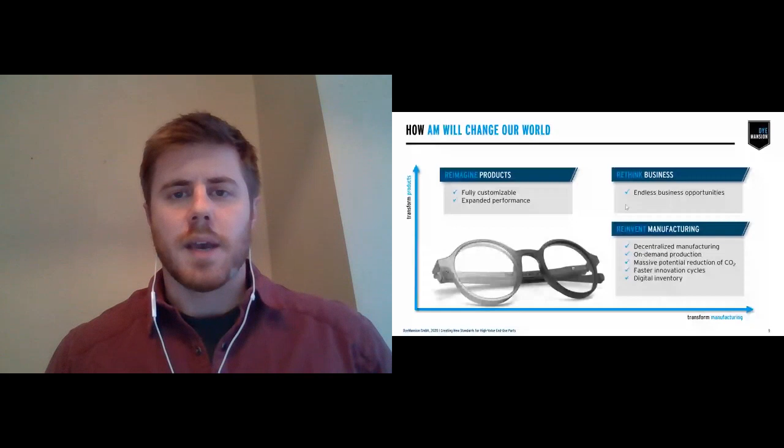So what do we actually need to have happen to change this industry? We need to be able to push this into high-value and end-use parts, and we need to do that at scale.

So what do we do at Dyemansion? We turn 3D printed parts into things like high value eyewear. We can turn all these parts into opportunities, like this automotive part, which is actually a rest inside the automobile. Or we could even turn some of these parts into high fashion jewelry. And lastly, one of the big opportunities here now is in the medical space.

So what's currently available in the market, and why does it not meet what the industry needs? The big reason here is because it's a manual approach. What exists right now is your manual sandblasters, where you have a couple different technicians who might be operating them on different days, and we see opportunities for damaged parts. That could just be as simple as technician 1 does it a little bit different than technician 2. Their distance from part to nozzle might be a little bit different.

Their blasting strategies, or even just the duration in that chamber, might be different, and you're going to have inconsistent results every time. When we talk about dyeing parts, there are a couple options out there that are very easy to start with. The image on the bottom there is actually a pot dye sample. It's what's very common in the industry right now. But again, that's a very non-reproducible approach. As you can see, it's a hands-on approach. So if you have different technicians doing it, you might have different chemistries or mixtures each time. And again, if you have a very specific application, it's nearly impossible to find any kind of ISO certifications around that.

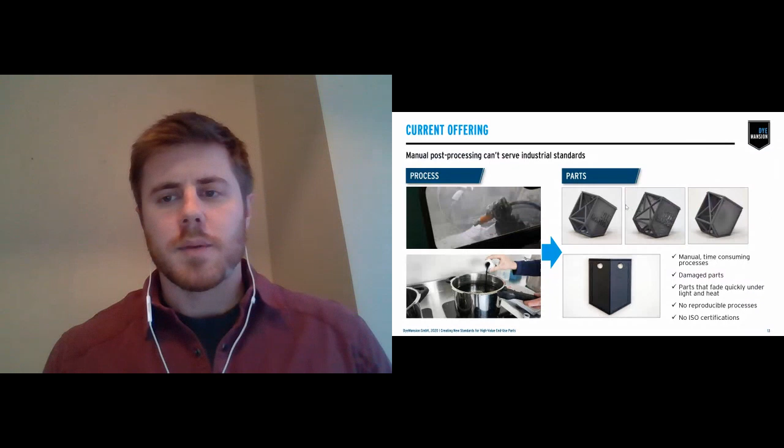So where do we focus all of our efforts? We started mostly in the powder bed technologies through your SLS and MJF, with all the most commonly used materials that exist in the market, your PA12s, your PA11s, and your TPUs. And lately, we've actually moved that into some other technologies through SLA and CLIP, through the EPUs that exist through those technologies. And a big one here is actually ULTEM through FDM.

Now, ULTEM is one of the highest volume parts in aerospace industries. It's a very difficult part to push to the next step, from raw part to a finished product that's in the plane. There's a lot of extra processes that go before it's a painted part that goes into it. And that's where we can come into play, because we can actually eliminate all those manual processes prior to paint.

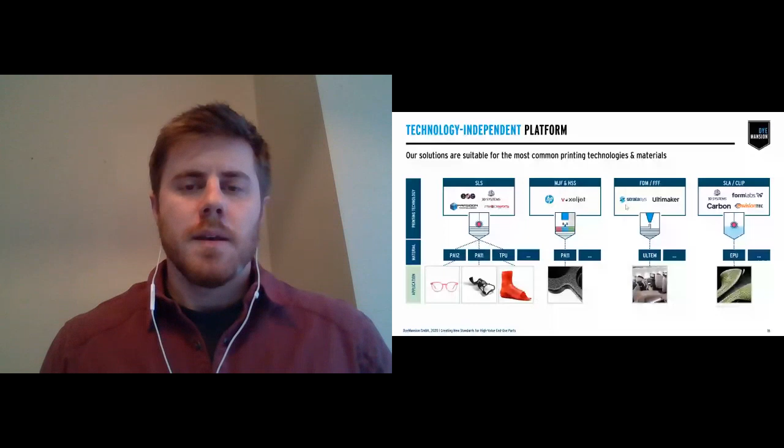So a little bit about Dyemansion themselves. We were founded back in 2015. We're located originally just outside of Munich, and now we have a facility in Austin, Texas as well, with a team of well over 60 people now.

So our founders did start the company way back in 2013 with the idea of 3D printed smartphone cases. And it didn't take them very long to realize that wasn't a successful approach. That's when they moved into the home of coloring. So in 2015, as you can see, it was a pretty eventful year. Initially created the birth of Dyemansion, moved into an initial seed investing round. And from there, we launched our first product, which is our DM60.

The DM60 was in the market for quite a while, and it was an amazing opportunity for customers to create new end-use parts. But the bad side was we had no controllability of what happened from print into our color machines, what those couple processes were, from depowdering, surface finishing, and whatever it might be. And then we saw challenges with deviations in part quality at the end.

So that's when in 2017, we really backtracked quite a bit and decided we need to standardize this process and create a controlled approach prior to color. So Dyemansion released our full workflow, which is the PowerShot C, the PowerShot S, and then the DM60. What this did is it actually controlled all those user processes, so we can guarantee a reproducible finish afterwards.

So in 2018, we realized that we really wanted to push even further in R&D and development and continue our expansion. So we had our first Series A funding round of a little over 5 million euros. And that's when we expanded into the US. We grew our North American team, serving all of the Americas. And we also launched a couple of new color lines, very specific applications here.

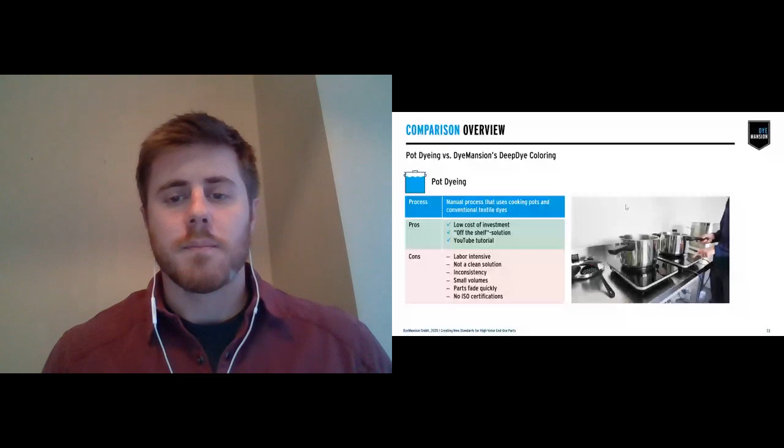Because it's using a cartridge-based system, it has that traceability, so we can go all the way back to the recipe. If there was ever an issue, we can understand what batch that recipe came from, and whether the problem was in the pigment itself or traced into the machine. We can track the heat values in the machine and how it was actually working.

With this, we offer almost a near unlimited color option and also the ability for color matching. So if corporate colors are key, or even matching skin tones on some medical devices, that's fully capable. The big benefit here is also that we can meet all of your ISO certifications that exist on the market. We'll get into that a little more later. And as I mentioned, with the seamless integration, it allows for reproducible results.

If we want to dive a little further, when you're looking at your ROS, we do offer a reverse osmosis system for guaranteed water results coming into the machine, and also an add-on reservoir for customers who are running black cartridges for multiple uses on a single cartridge.

Now, with any piece of equipment that exists in the market, there are some downsides. It is a little bit longer process time—we're looking at around a 2.5 hour process time. And because it's a complete closed system, you are limited in batch size, because we also have to worry about water displacement when putting parts in there.

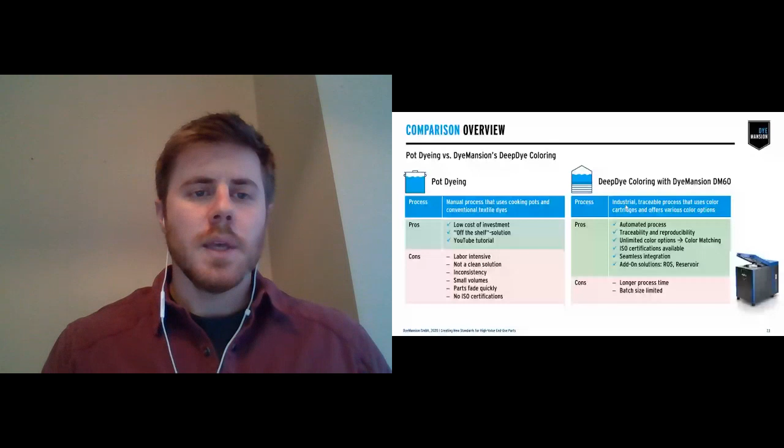Into the DM60 a little more: as I mentioned, almost complete limitless color options and a standardized database for your tailor-made recipes. It's based off an RFID chip, so it has reproducible and traceable results no matter what, and of course we have ISO certifications. For the standard process for your SLS parts, MJF parts, or even some EPUs, we're running around a 2.5 hour process from a raw part to a finished colored part at the end.

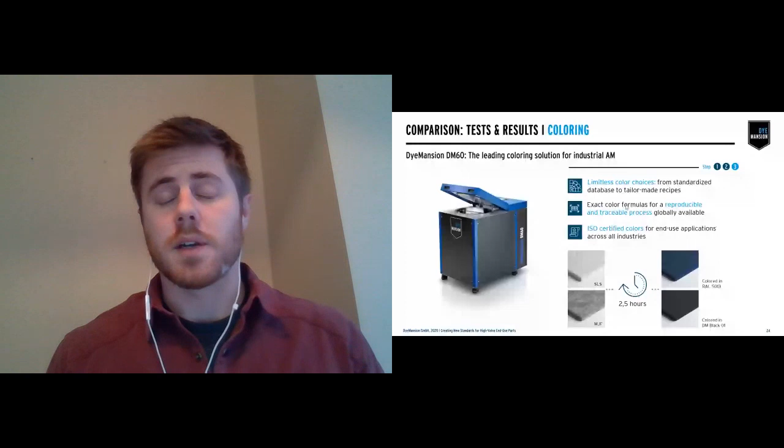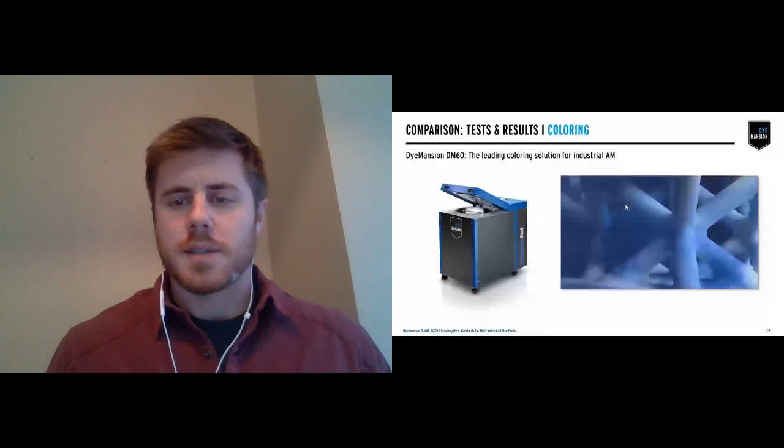What you can see is the dye going in—it's a water bath. Within this process, it's using a combination of heat and pressure to separate some of the molecular levels of the chemistries of the polymer, allowing that pigment to get in there. Then it seals it back up.

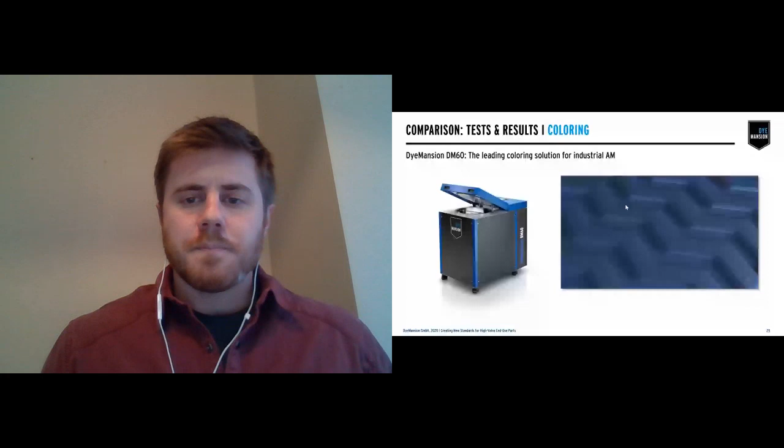So we can go from your SLS parts to a dyed finished part. And even your MJF parts are capable of running through this machine as well.

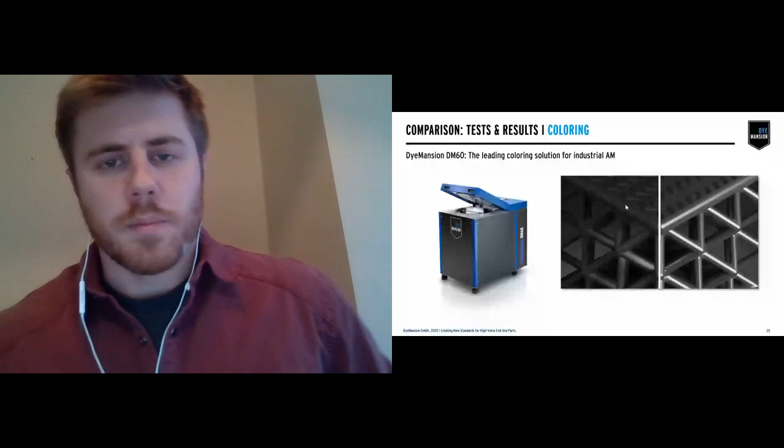So how is this completely controlled and reproducible? It's all based, as I mentioned, off that cartridge. That cartridge has an RFID chip, but it's based off parameters. Just like if you're running your printers with different materials, you're not going to run the same strategies or parameter settings for a PA12 versus a PA11 or even a TPU. So all those things really play a factor into coloring as well.

Within that RFID chip, there's a tag on the back that understands what your layer thickness might be—whether you're running 120 microns or 80 microns or whatever it is in your process—what your powder refresh rate might be, orientation within your build, and it's also based on what material you're running and the finish that happened before that. So if it had a tumbling finish or a power shot finish, or even if it was your own process, all of that needs to be factored in.

Now that cartridge is scanned, tells the machine what needs to happen and how it needs to happen, and it guarantees that perfect reproducible result no matter what—even if technician 1 is doing it, or 2 years from now a new employee is doing that same process.

We offer the largest color variety available on the market today. We have 17 core colors in Dyemansion and well over 170 RAL and Pantones. As mentioned with our special color line, we have 4 neon colors, and we do have UV stability within our black. The reason we only have one at the moment is because automotive companies at this time are very specific on their interiors, so black is kind of the common ground, and we started with that as a baseline. As mentioned, with corporate colors or even skin tones matching your medical devices, that's a near unlimited opportunity of colors.

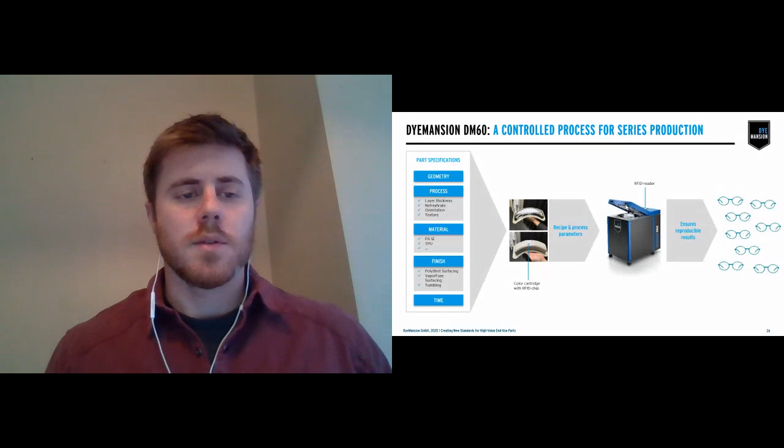Into the actual test that we did here, we ran it off of base materials - two highly common materials used in the market now: EOS's PA2200 and HP 3D HR PA12. We ran it in two different processes: our standard DM black cartridge, and then against the most commonly used textile dye that exists in the market. We had two different finishes for this test setup: a raw finish, and then we actually did it through our PowerShot S finish.

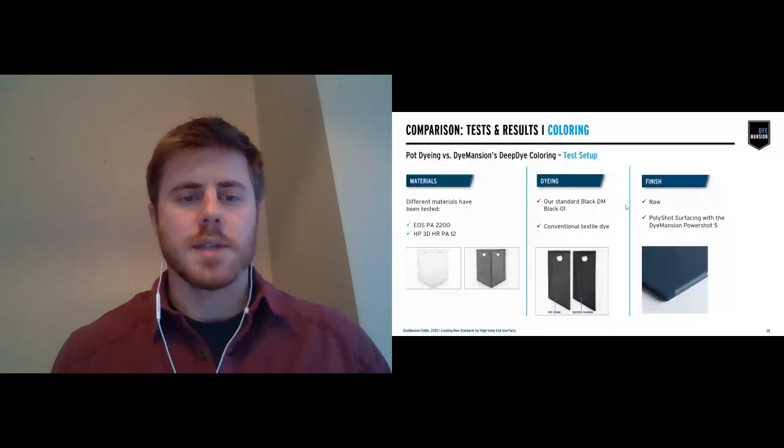The tests themselves: we ran the light and heat resistant test, which is actually the automotive standard for interiors. We ran a scratch resistant test and then a color fastness test, which included washing, bleaching, and perspiration.

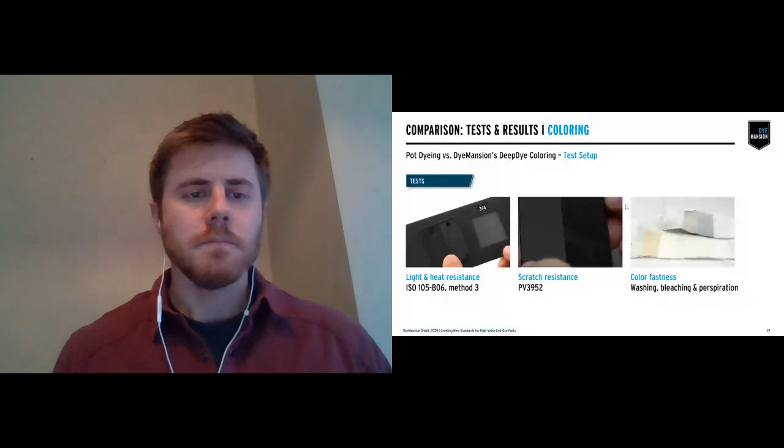Starting with the first one, this UV light exposure is at 135 hours, which is the ISO standard for automotive interiors, as I mentioned. It's really important to understand the visuals here. The top row is your DM60 approach, the DM black. On the left side is your PA2200, and the right side is your HP PA12. As you can see, there's not a lot of big change there. But on the bottom two, it's a huge visible change, and that's actually with the standard conventional textile dyes.

The biggest thing to understand is that in this industry as a whole, the average delta E values you want to see change usually want to sit below a change of around 5. With the pot dyeing systems, we're seeing values well into the double digits. But with the deep dye coloring system, we're seeing values below 5. And that's just with the standard DM black. When we move into the UV standard range of the automotive line, we see much better results, even further.

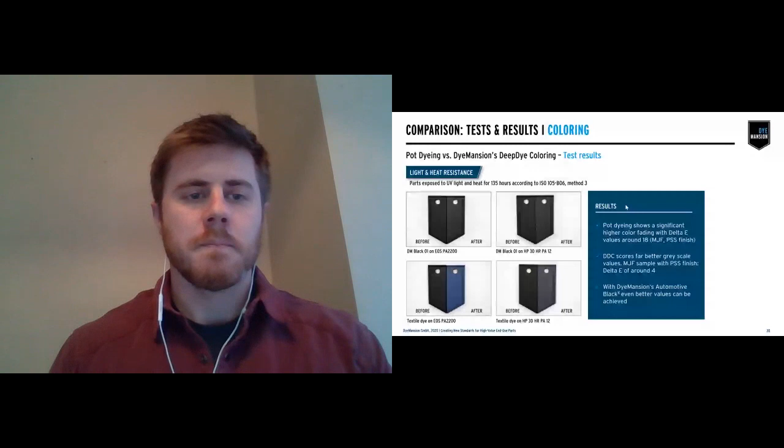From the scratch resistance test, we actually didn't see a huge difference on pot dye versus the DM60 dye, and that's mostly because that has to do more with the surface quality than the color itself.

Into color fastness, we're going to focus on washing - if you want to read further into bleaching and perspiration, we can hand off a white paper to you all later. For washing, on the left-hand side are your textile swatches. Essentially what happens in this test is you have your printed part that is dyed through either process, and then it is rubbed against these different textiles and composites a certain number of times based on the standard. What we're looking for is a transition of dye onto that textile. We can see that the DM black, on the bottom of each of these two rows, had a much better result, and visually you can see that pretty clearly.

What we're looking at and comparing is actually a grayscale value of 1 through 5 - 1 being the most change possible and 5 being the least change. With the DM60 results, we did see values around 4 to 5. The textiles weren't terrible, but we did see a somewhat lower value of 4 on those. If you want to look further, especially into the perspiration test - if you have eyewear applications or things like that - please talk to me afterwards and we can dive deeper into what those results look like.

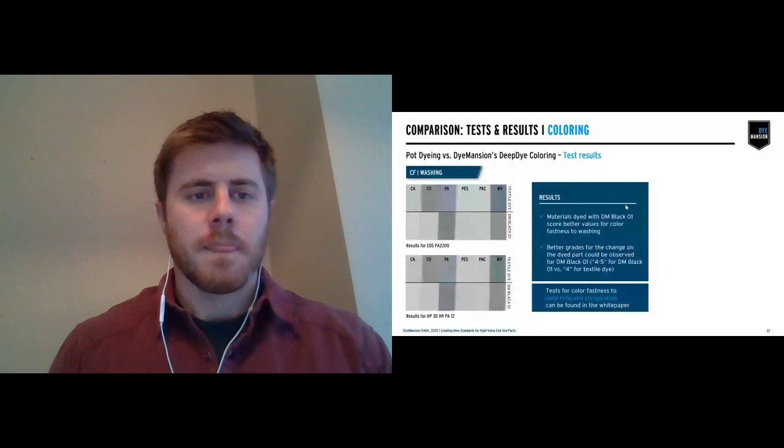As I mentioned, these are all listed in the white papers. The white paper we're releasing will actually be released early next week as an exclusive. It goes really deep into manual pot dyeing versus the industrial deep dye coloring system.

You'll see all of the actual test setups, the results, and even industry applications. If you want to read more, you can look into the automotive line color white paper, which goes deep into automotive applications, what those UV standards mean, and how the results compare to our standards. We also show off our RAL colors through SLS, and we have color options for MJF as well.

When we look at surface quality, a good high value part really needs a great surface finish to meet your application or standard needs. So you have a couple options. You can have your raw part, which is probably most useful in non-visible applications, base customer approaches, or even some prototypes.

Then we get into the next two levels of better quality. There's PolyShot Surfacing, our PowerShot system, which gives a really great haptic feel. Or if you need a completely sealed and smooth surface, we go to our VaporFuse system, which allows the part to completely seal the surface.

Deeper into the PowerShot S - it's a mechanical process, as mentioned. It does achieve a semi-gloss finish, and at the moment it is the most effective solution on the market. It does improve your scratch resistance, and of course it is a very short cycle time.

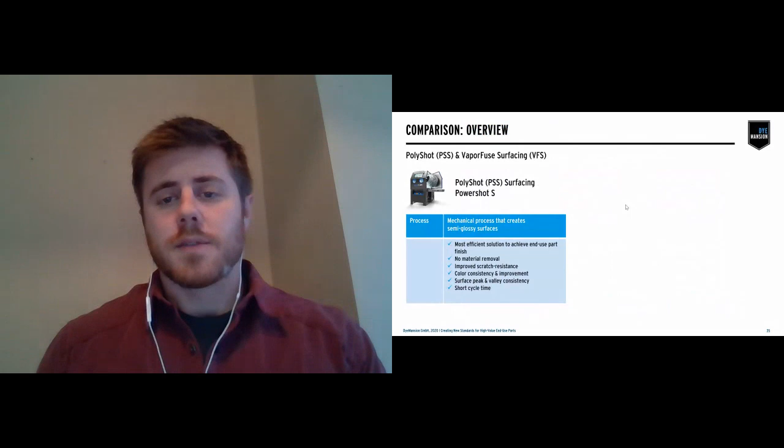Diving deeper into the PowerShot S, it is currently the most efficient technology to get to that end-use finished part, with a cycle time of only 5 to 15 minutes for your standard mid-size printer. A full batch can be run at one time. It also increases your ability to get maximum color results, because you're creating a more standardized approach to that finish.

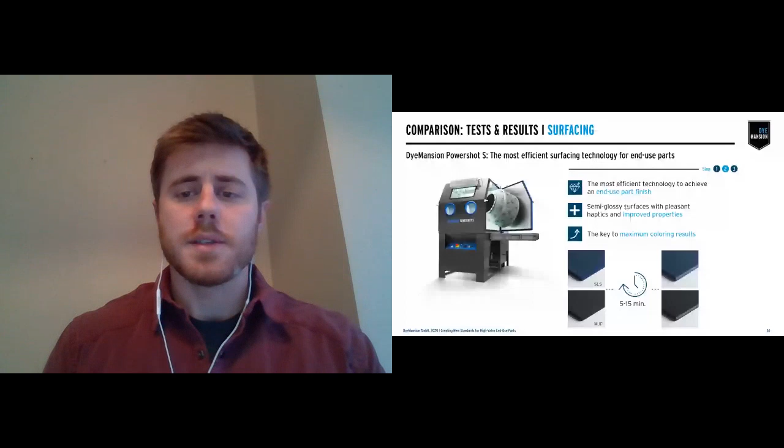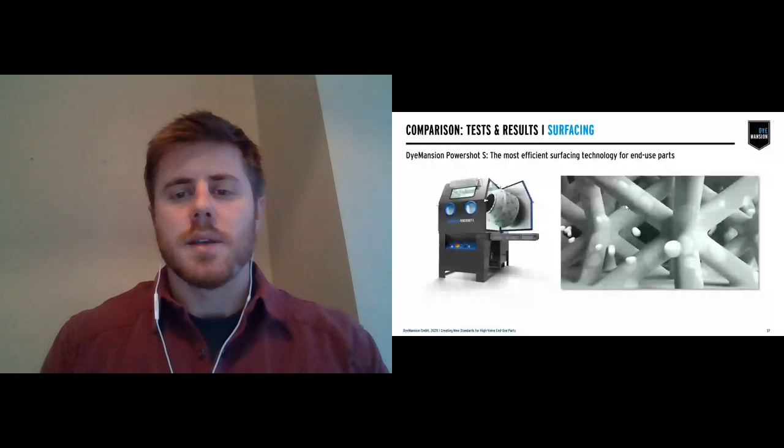This is just a quick snippet to show what's happening in that machine. Because this is a mechanical process, those are the blasting media actually impacting the part. What we're seeing here is it impacting and knocking down some of your peaks and valleys, reducing the roughness you feel and allowing a much more haptic feel and better finish. So when color is then applied, it's a more even approach.

This can be done through SLS and even your MJF processes. The last image there shows the part after color as well.

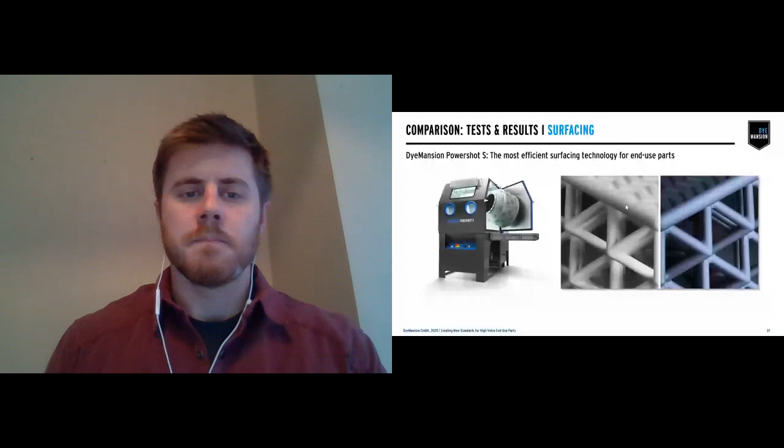Deeper into the VaporFuse system - this is a clean technology, fulfilling all of your industrial health and safety standards with no waste whatsoever, as mentioned, so there's no consumable you're interchanging. The solvent we're actually using is completely approved for food contact, and you're creating a completely sealed, injection molded-like surface. And when I say sealed, it is washable as well.

The cycle time is dependent on the density of your materials and the softness of it, so it could be anything from 40 minutes all the way up to 80 minutes as needed.

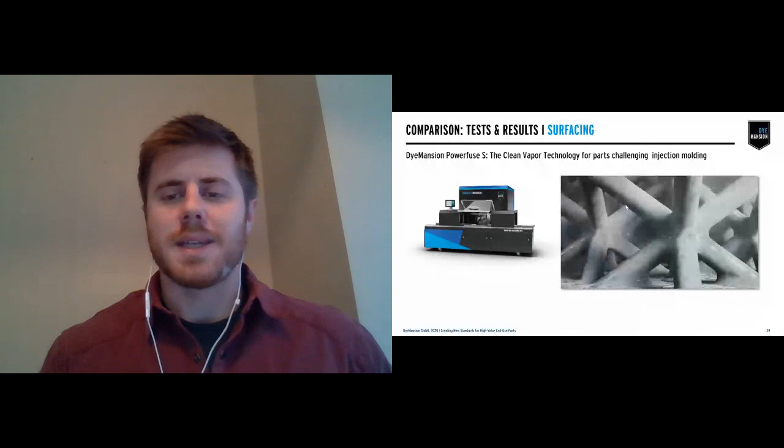This is what's happening in that machine - again, this is a vapor technology, so the vapor is introduced into the chamber, onto the part. When it reaches the right temperature, the vapor condenses on the part, reacting at the molecular level with the molecules, causing them to agitate, shift a little bit, and realign, creating that sealed, perfect finish.

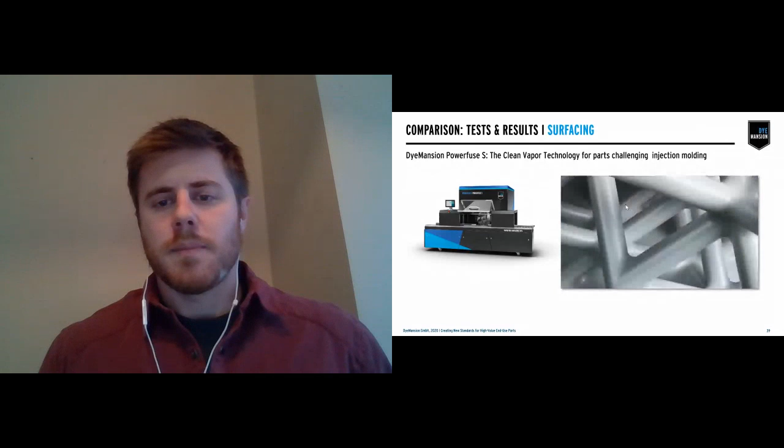Now, what's important to see here is that this process can actually be done on all of your materials that you want to throw in that machine. So all of your standard polyamides and even your elastomerics.

So what did we test here? We tested again the standard materials that we see as the highest volume in the market right now - your EOS PA2200, your HP PA12s, and we even threw in the Lehmann & Voss TPU. We converted in 3 different surface treatments: no treatment at all, the PolyShot finish, and then a VaporFuse finish. And we tested against roughness, gloss, and water repellency.

And what we can see here is a visual, very clear imaging to understand your peaks and valleys. That raw part's all the way on your left-hand side there - your top two are your PAs, and the bottom one is your TPU.

And what's really important to see here is that with the PowerShot system, we do see a great reduction in surface roughness in the mid 40 percentile range. But what you can see right away is that because it's a mechanical process, it doesn't really do a lot to your softer elastomeric materials. And that's where the VaporFuse system comes into play the biggest.

So with that, you can see right away that percentage is 98%. It's an incredible decrease in surface roughness. And even with your other polymers, we do have an incredible reduction in surface roughness.

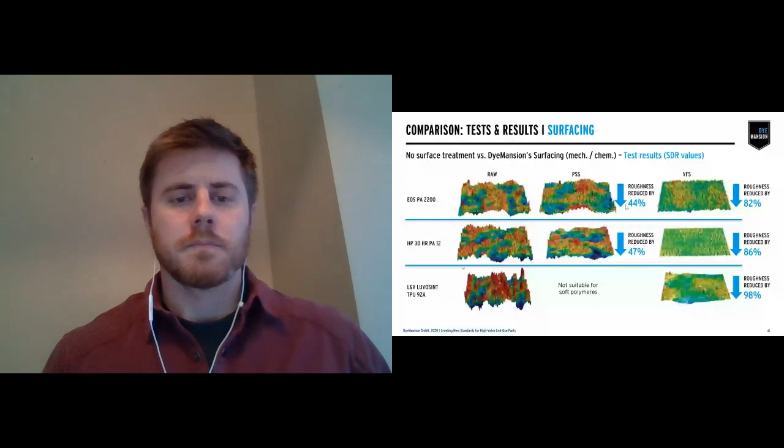Now you can read much more about this particular process and the testing that we did in our white paper. We have all the tests and the results, and again, as I mentioned, your further fields of application that you might find this useful for.

So how do we actually get this running? How do we move this into your production line and give you the opportunity for high value parts?

So what our workflow covers is all the industrial needs, delivering your high quality parts, reproducibility. It's completely geometry independent because, as I mentioned, it's different processes - it doesn't really matter what you put in there. It does have the ability to reduce costs, both in labor and time. And we do have certifications around it, with all machines being full Industry 4.0 ready.

Again, this is just an understanding of what that workflow looks like. So we can start off with the PowerShot C's basic cleaning opportunities, push that into the better surface finishing through either mechanical method or chemical method, and then finish with the coloring setups.

And how do we get started even more so? You can try it through the free benchmarking or even on-demand finishing, or you can even go in with your parts for live benchmarks through our Munich location, and coming soon in early summer, our Austin, Texas location.